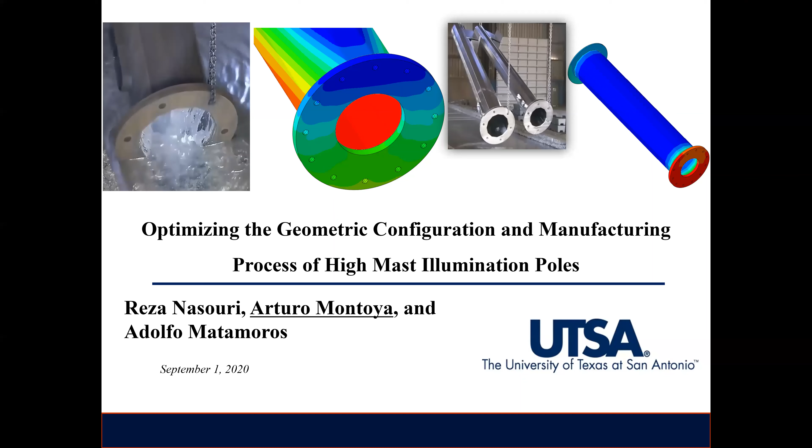So I'll be presenting on behalf of my team, which includes now Dr. Reza Nasouri, who was a former PhD student of both Dr. Matamoros and myself. We have been working on the reliability of high mast illumination poles for about 4 years. This will be a brief summary of the work we have done so far.

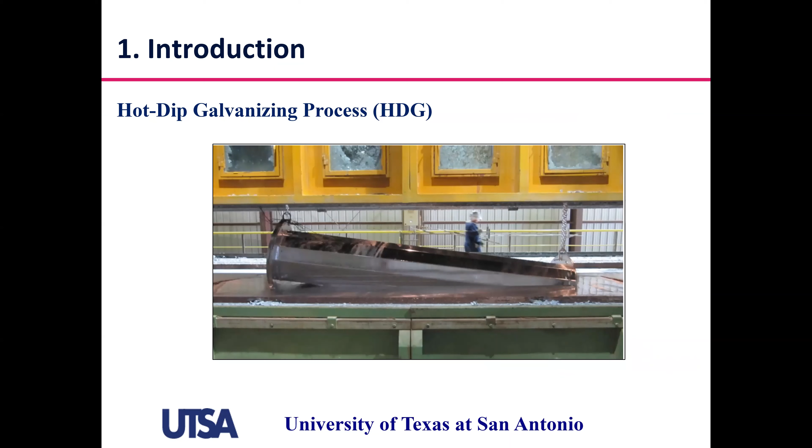The motivation for our work is that most steel structures have to go under a galvanizing process because that creates a coating layer that protects the structures from corrosion, and it is a very effective method to protect steel structures from corrosion. However, it has some flaws because it has been detected that after this galvanizing process, small weld-toe cracks form, and these weld-toe cracks develop during galvanizing.

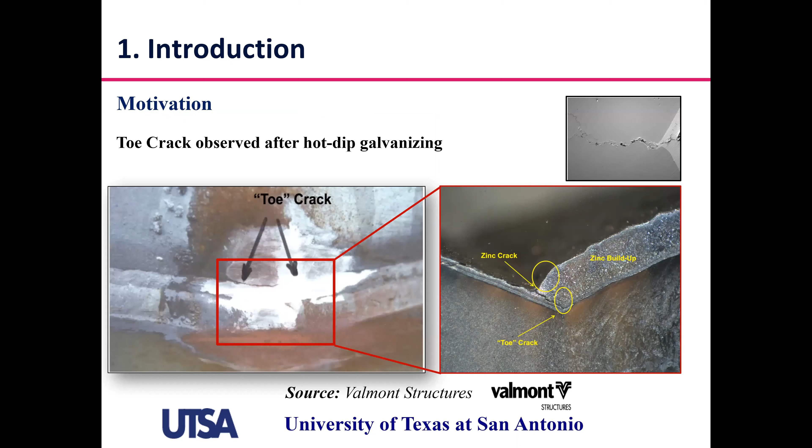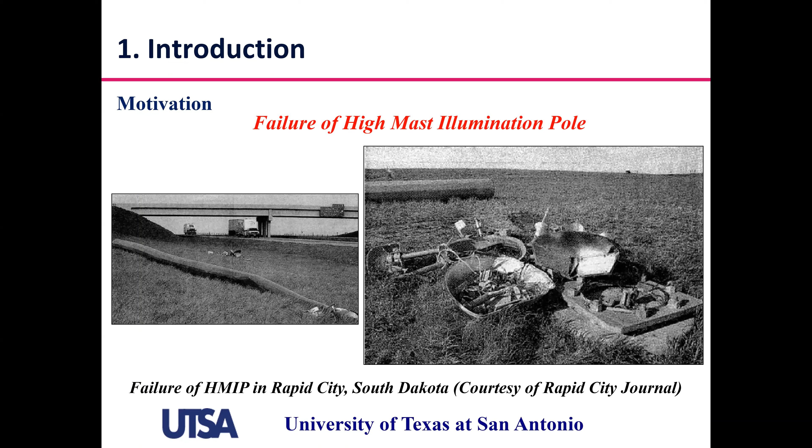If these small cracks go undetected, because they are exposed to fatigue loading from winds while in service, they can propagate and the poles can fail, causing a catastrophic failure that can even cause loss of human lives. So it's very important that we try to minimize the formation of these cracks.

So we're trying through our study to provide some guidance to engineers, galvanizers, and fabricators on how to minimize the likelihood of crack initiation during the fabrication process of high mast illumination poles.

Our methodology consists first of developing a reliable finite element model that can capture the high stress demand spots induced during the hot dip galvanizing. It's important to develop a model because there's very limited data we can track experimentally, because the temperatures of the hot dip zinc bath are on the order of 800 Fahrenheit, so strain gauges actually melt. It's very hard to track the behavior of the structure during galvanizing, so the models have become a great tool to study these structures.

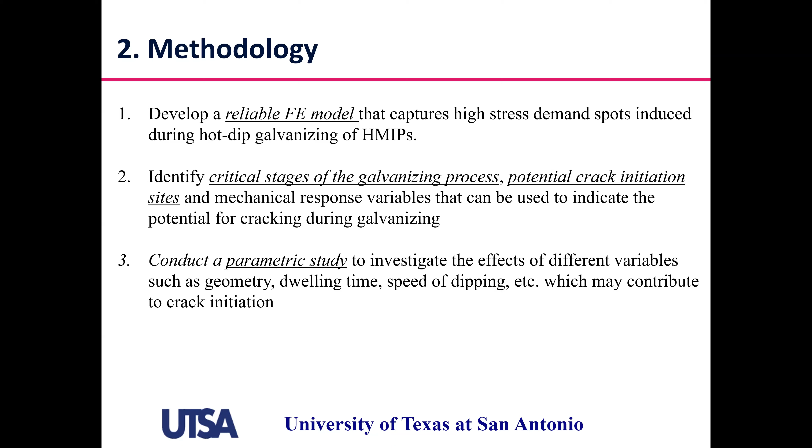Then, through these models, we try to identify the critical stages of the galvanizing process and the potential crack initiation sites. Finally, we conduct a parametric study to see if small changes in the geometry and the galvanizing process can contribute to minimizing this cracking phenomenon observed in high mast illumination poles.

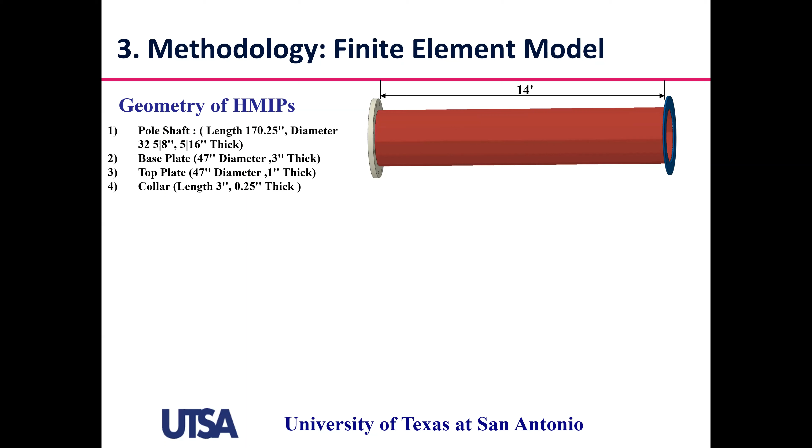So first, let's go over our finite element model. This is the geometry that we have used. Typically, a high mast illumination pole is composed of a pole and a base, with a base at both sides. These are typical dimensions. There are many details when it comes to the connection between the base and the pole, and they vary by state. We have modeled several of them.

Here I'll be presenting results for the Wyoming detail. The Wyoming detail has a full penetration weld between the pole and the base, and then a backing ring. This backing ring was introduced to improve the fatigue performance, but didn't consider its impact on crack formation. So through the study, we also try to capture the impact of the backing ring on the crack formation phenomena during galvanizing.

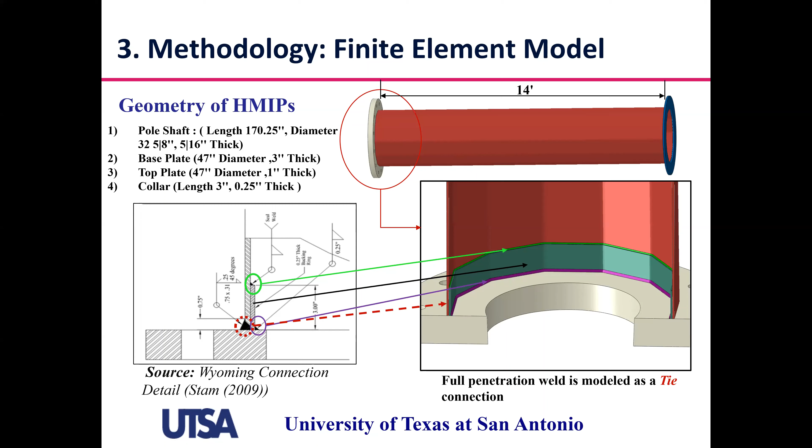A typical galvanizing process consists of 4 steps. First, you dip your pole, typically at an angle, and then you leave it there for some time to make sure the zinc attaches to the pole and the base. Then you extract it, and finally let it cool down.

This is the process that we are modeling through our finite element simulation, and for that we do it through a coupled temperature-displacement analysis, because we are interested in both the temperatures and also the mechanical response of the structure.

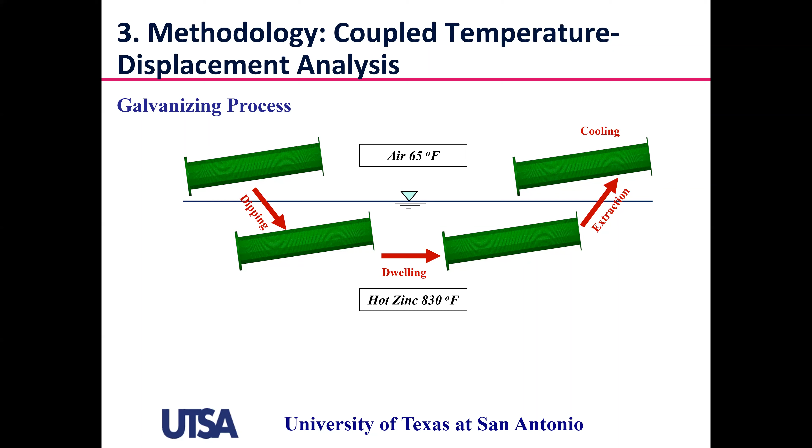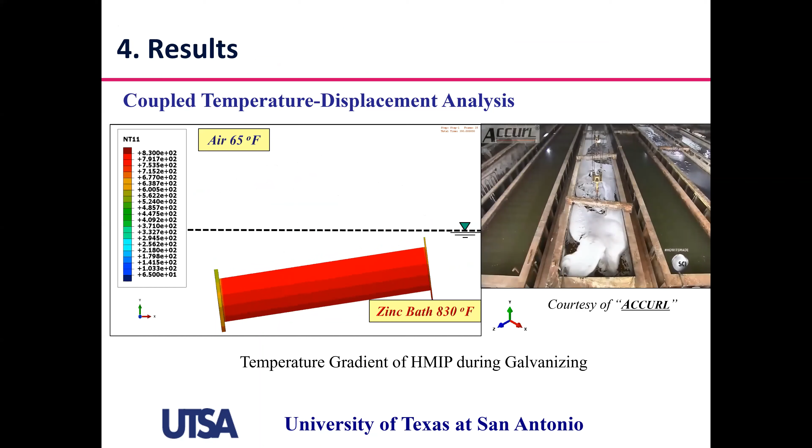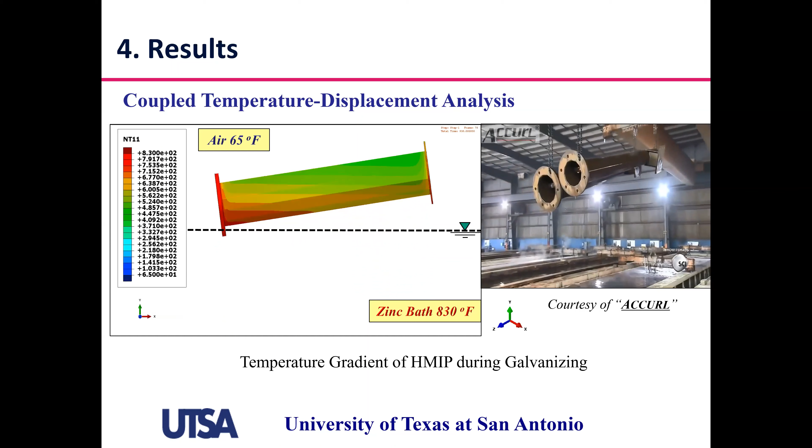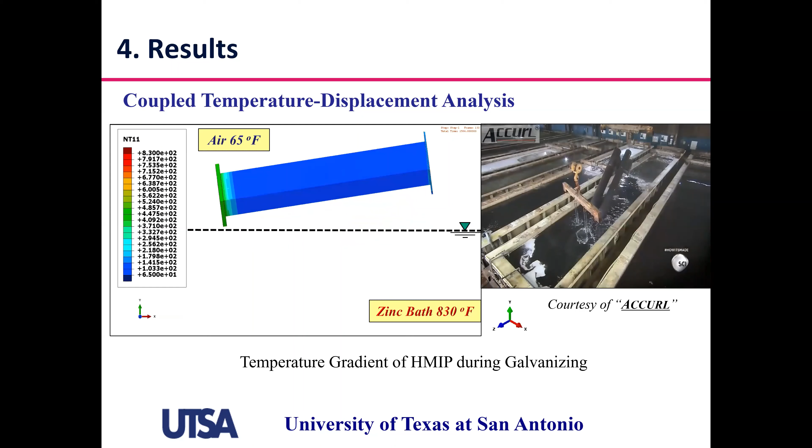These are some results of our simulation, where we try to capture the bath process. We created some user routines in Abaqus to be able to mimic this galvanizing. Here you can see, as you submerge the high mast illumination pole through the zinc bath, the temperature changes quite rapidly, and then you extract it, and the structure starts cooling down, as you can see here.

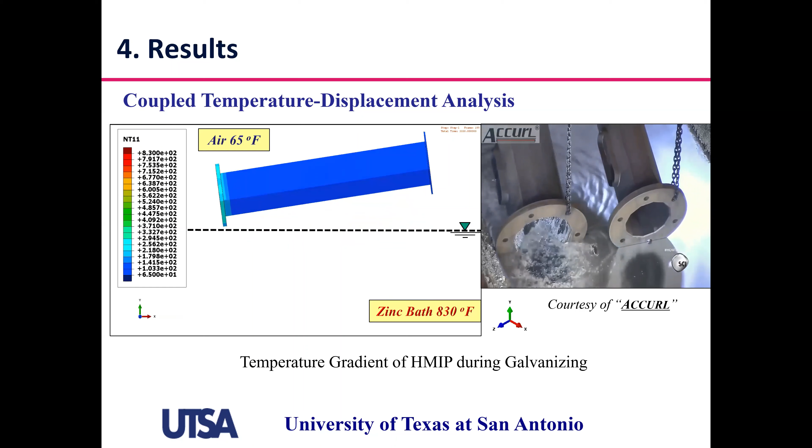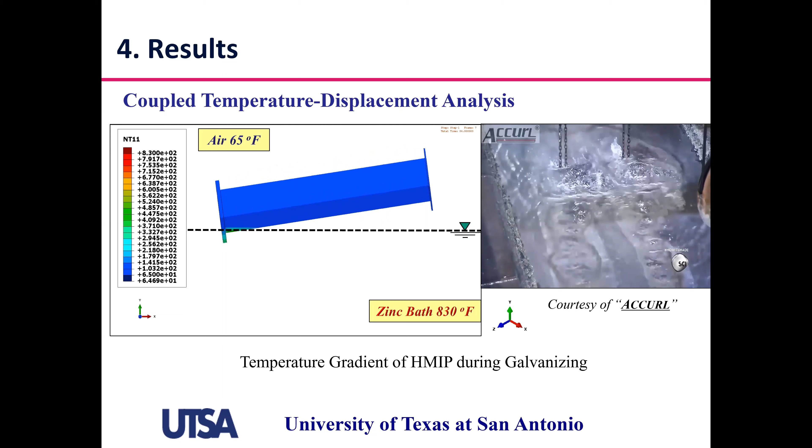We were able to calibrate our model with some experimental results that were available for early stages of the simulation. There were some thermocouples that allowed us to achieve good agreement with the experimental data.

Then let's look at what would be the critical stages of this galvanizing process. Here you'll see the stress results at a bend of the pole for the 4 different stages, which are dipping, dwelling, extraction, and cooling.

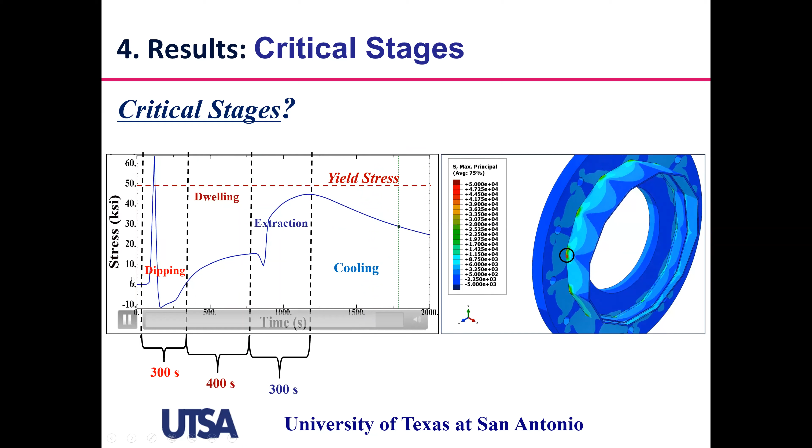You can see during dipping, we have this huge thermal spike, and then during dwelling, the stresses somehow level off, with not much variation. But then during extraction, there's another increase in stresses, and this levels off during cooling. But after this process, there are some residual stresses that are left on the structure.

It is important to know that we use thermomechanical properties, and the mechanical properties are temperature dependent. So the yield stress is lower and changes with the temperature.

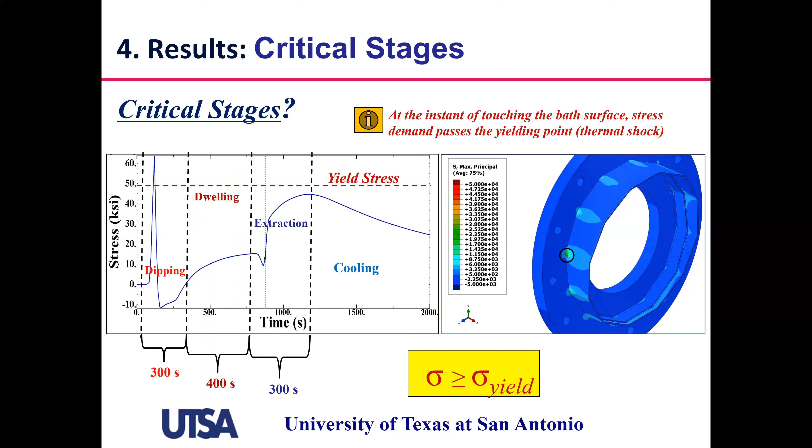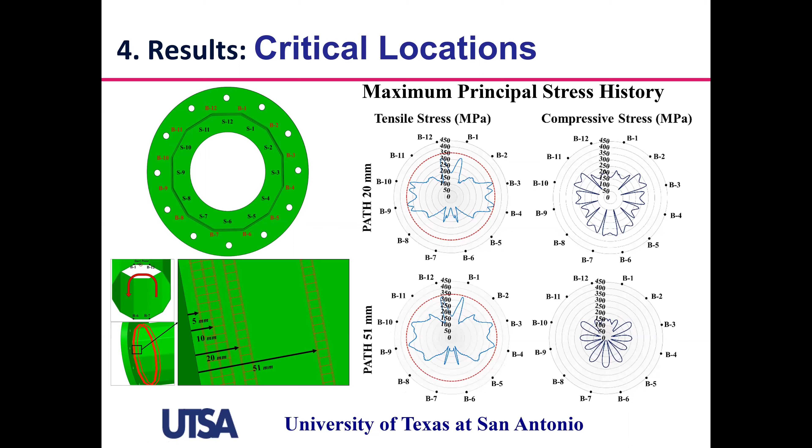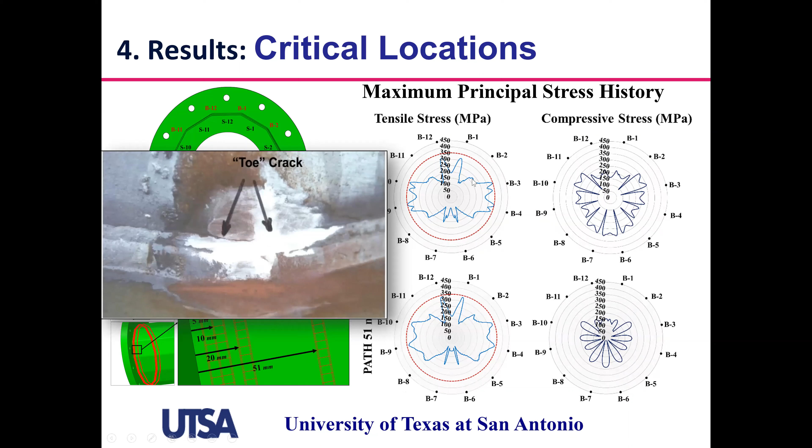An important observation is that from our models, we were able to capture the location of potential weld toe cracks, because as you can see, the spikes of the stresses are always at the bend, particularly bends 3 and 10.

Another measure we used to capture these potential crack locations was the equivalent plastic strain. I particularly like this measure because the stresses are time dependent, so they vary up and down during the simulation, but the equivalent plastic strain keeps accumulating. It's a measure of the deformation undergone by the material throughout the simulation.

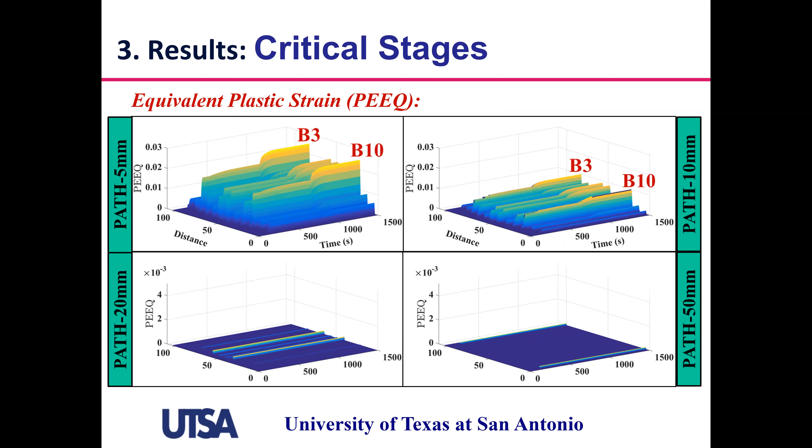Then we did a parametric study to see what would be the effects of geometry on this crack formation phenomena. We first kept the pole thickness constant, and we changed the base plate thickness.

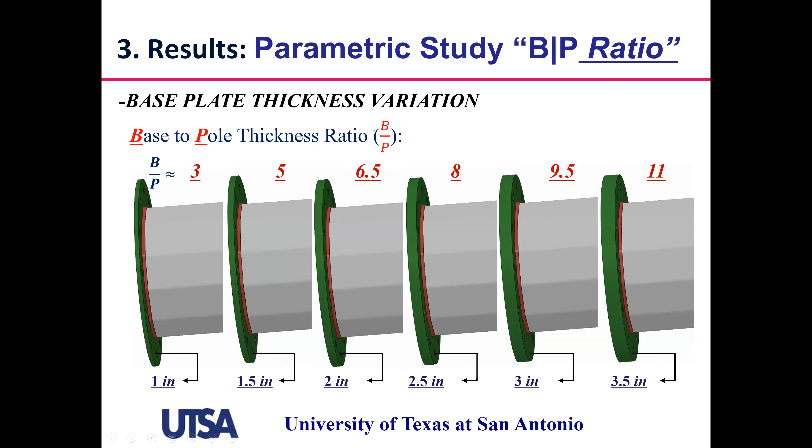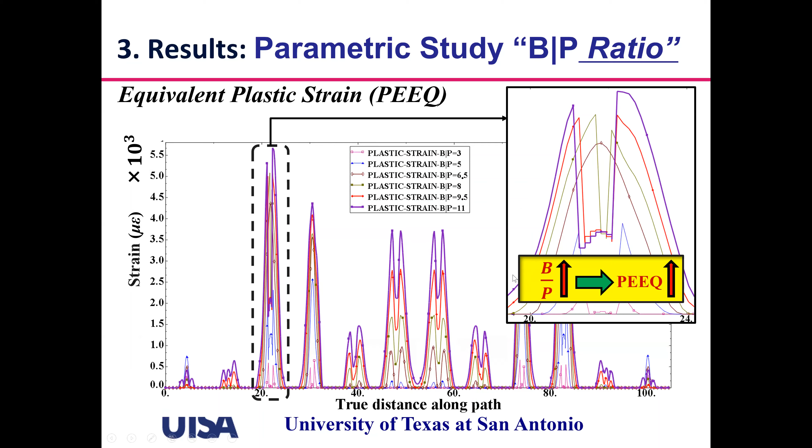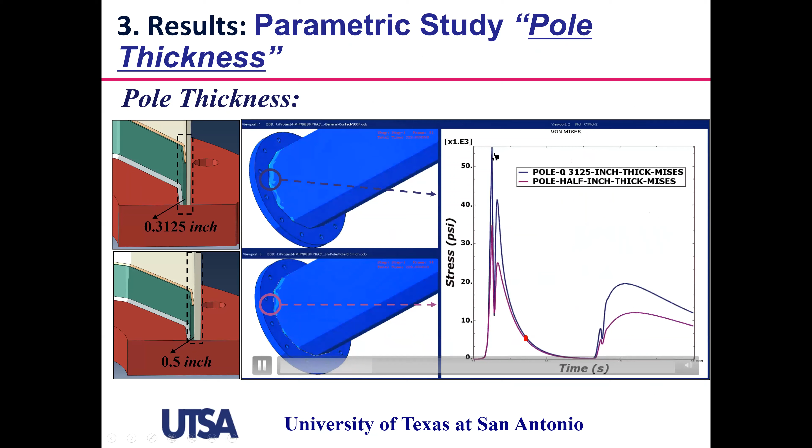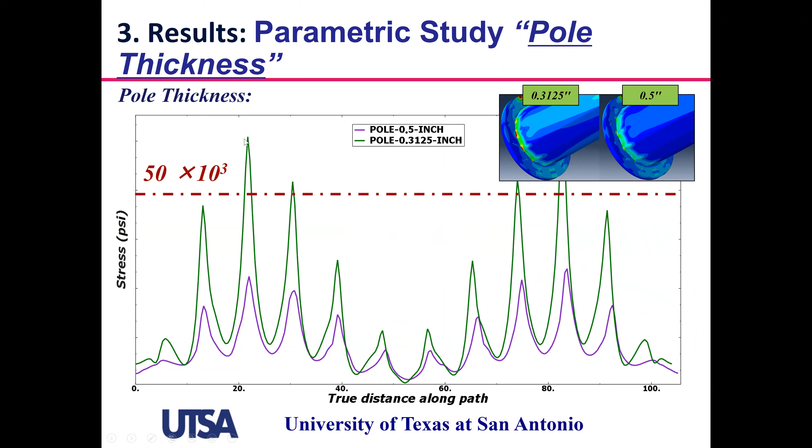Then we compared the effect of the pole thickness by keeping the base constant. From here, we can observe that if the pole thickness is lower, the stress demands are actually going to be higher. In the interest of time, let me move on to the next slide, which shows similar information, that lower thickness corresponds to higher stress demands during galvanizing.

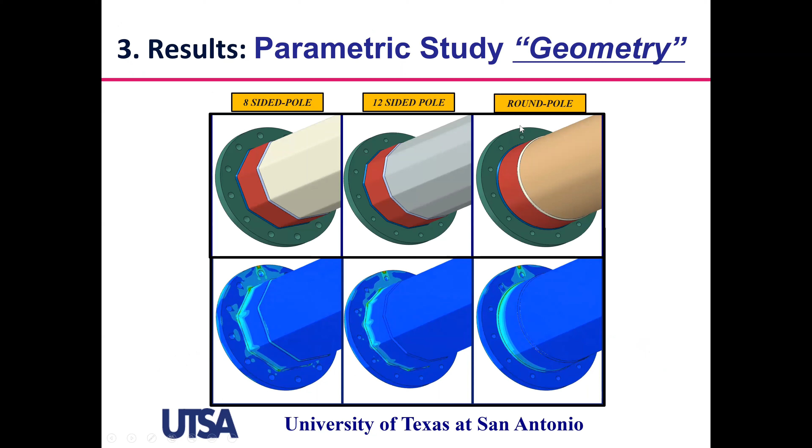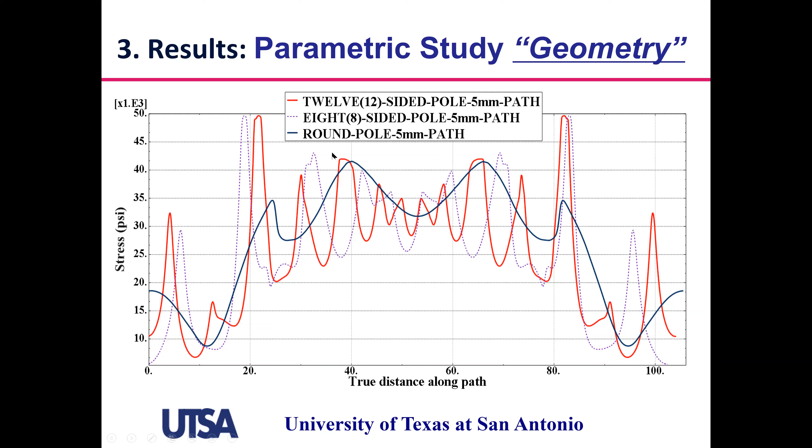Then we also studied the effect of the curvature or shape of the pole. Here you see we consider an 8-sided pole, a 12-sided pole, and a round pole, and we repeated the galvanizing simulations. As you can see, the round poles actually have less stress demands during the simulation, while the 12 and 8-sided poles have similar demands. So it seems that curved or round poles would contribute to lowering this crack formation phenomena.

Then for future and current work, right now under Tran-SET support, we're also trying to include the effect of welding, because we realized that the manufacturing of HMIPs consists of different manufacturing steps. You first do some cold working on the steel pole, then you weld the base plate to the pole, and then you go through hot dip galvanizing.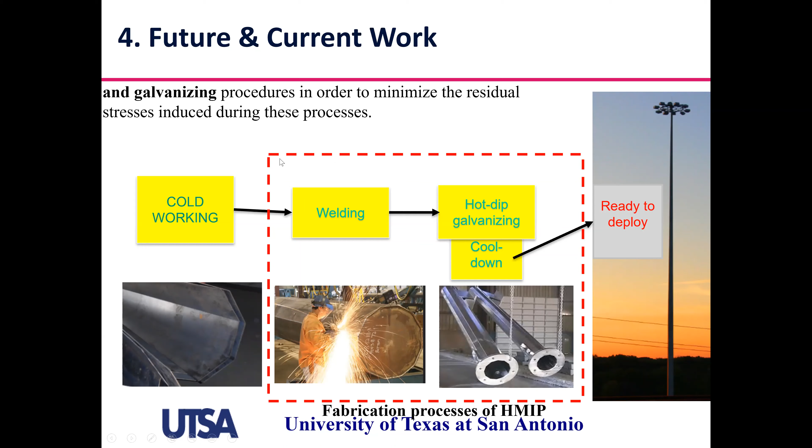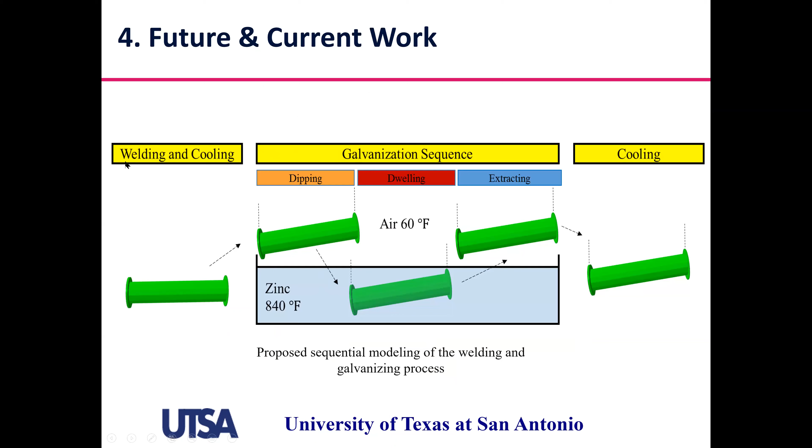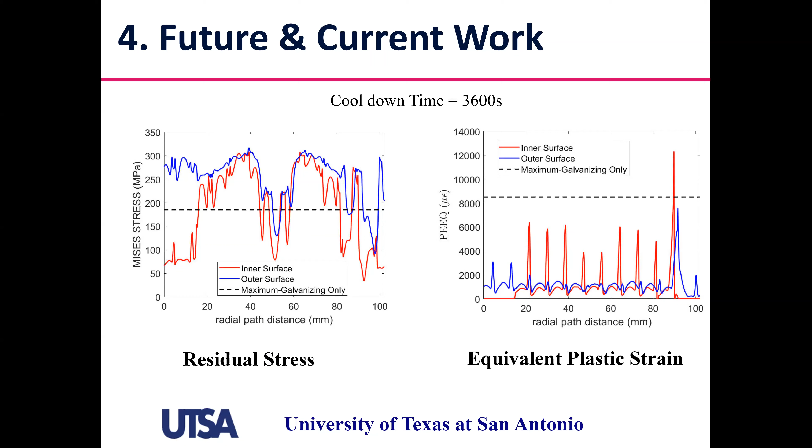So under this new grant, we incorporated the effects of welding. We had this metal part already simulated, and we added this part to the simulation, both welding and cooling. Here I show the stresses and the equivalent plastic strains through a path. The horizontal line indicates the maximum stresses and plastic strains we obtained just during the galvanizing phenomena, and then what would be the resulting stresses and strains once you have welding plus galvanizing. As you can see, there are actually some higher values due to introducing the welding to the simulation.

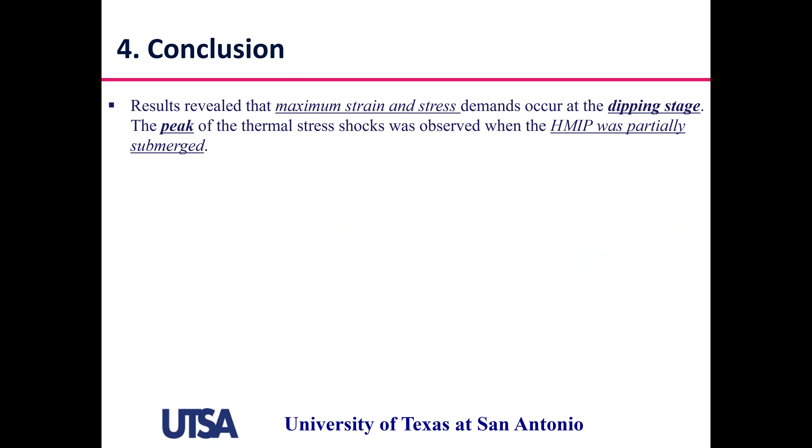So, some conclusions: the results revealed maximum strain and stress demand at the dipping stage, where we saw that thermal shock was highest when the HMIP was partially submerged. Through the parametric study, we saw that poles with the same pole thickness and smaller ratios of pole to base plate thickness correspond to lower stress and strain demands at critical locations. In models with the same plate thickness, stress and strain demands were higher for thinner poles than for thicker pole shafts. Stress and strain demands were also found to be lower for poles with circular shapes than for multi-sided poles. Finally, we can see that the stresses and strains generated at welding can also be contributing to the weld toe crack formation.